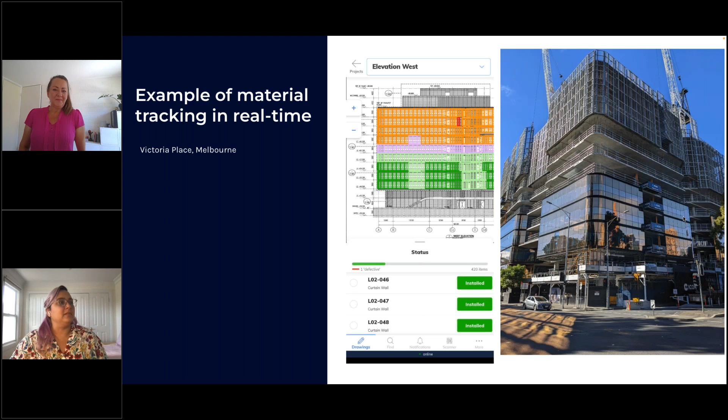Yeah, 100%. So honestly, that's all the slides we're going to really share. The proof is in the pudding, and I really want to hand it over to Zoe to walk us through what it looks like in action - really, how do facade teams today use Matrak and how they can really benefit from this supply chain visibility and connecting all of the players on the supply chain. So I'll hand it over to you, Zoe, to present.

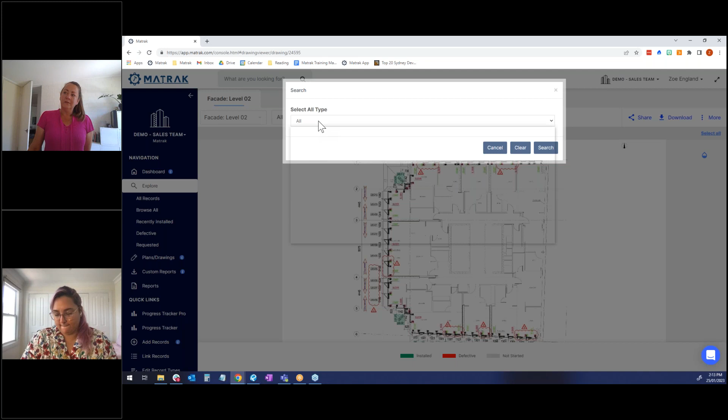So I'm moving to Explore and All Records. I want to look for the facade panels that I'm about to manufacture. In this case, I'm going to come to All, and I'm interested in facade, and I want to look at the facade on level 2.

So I've selected all of those elements. You can really drill down and just go to one unique panel if you want to. In this case, I just want all of level 2, and I'm going to hit search. So you can see I get a nice list similar to Excel, and we can also sort this list simply by clicking on the headers of these columns.

You can see I can bring it up and I can bring it down. So you can see I've got a number of not-started panels sitting in this list. These can also be imported from Excel spreadsheets from the manufacturer's system as well. I'm going to select one of these and I can update that individually, but that's too slow for me.

What I'm going to do is hold my shift key down and I can multi-select. So we've got 11 panels sitting here, I believe, and I can right-click, view 11 records, and you can see I've got all of those sitting in here. So I've got each unique panel ID sitting along the top.

I've got the status sitting here, so I can move that to manufactured. It's still at my factory. If we come down the bottom here, we've got our quality checks that can be ticked off.

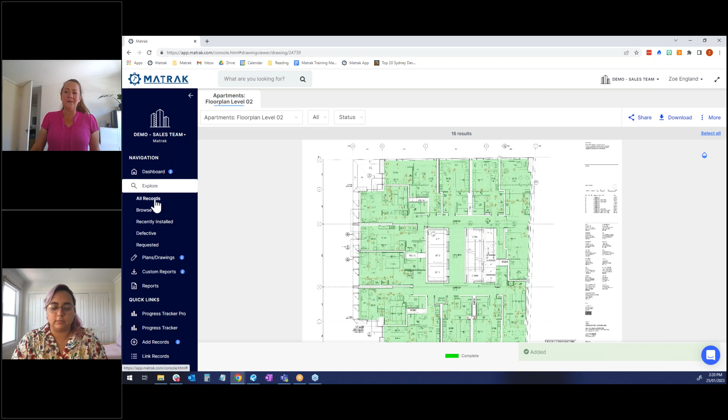I accidentally jumped to another page, but I'll pop back to my all records and you'll see that they've now been added directly into that particular stillage. So I hit search, and you can see those have all been added into the stillage itself.

So that's basically it for the factory. That's been loaded onto the stillage in the container. The cool thing is that you can have your logistics and 3PL company in the system with you, so they can come on and just scan the container or scan the stillage and know X number of panels are sitting in there, and update it as received into Australia, for example.

Are there any questions there so far, Gabs? The only question that's come up actually, and I think it's a perfect time to ask it, is how can we keep track of where the materials are in transit? I think that plays a little bit to what you just spoke about, the logistics piece. How would you answer that?

Yeah, for sure. So what we encourage people to do, and what a lot of our customers do, is actually create a QR code for the stillage itself as well. So if I come back to all records, the way that can be done is once I've popped things onto a stillage, instead of searching for facade, I can search for stillages or shipping containers and hit search.

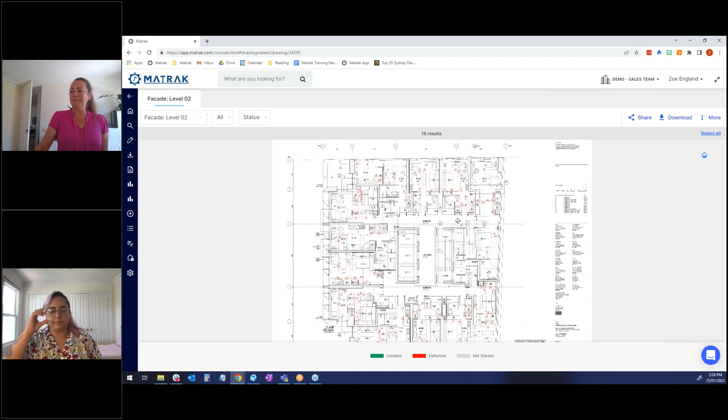Alright, so we've got our facade on level 2, and I'll just let my computer catch up. I think it's already on Australia Day holiday, the internet down here. My apologies, it's ready for some time off, I think. Yeah, that's it, that's it.

Well, while that loads, one question that did come through is, can you use Matrak without having everyone on the system? And I know you have a really good answer for that. So you're talking about the different stakeholders, like different companies? Right, exactly. Like the question is, do we need to have every single company on the system to make it useful?

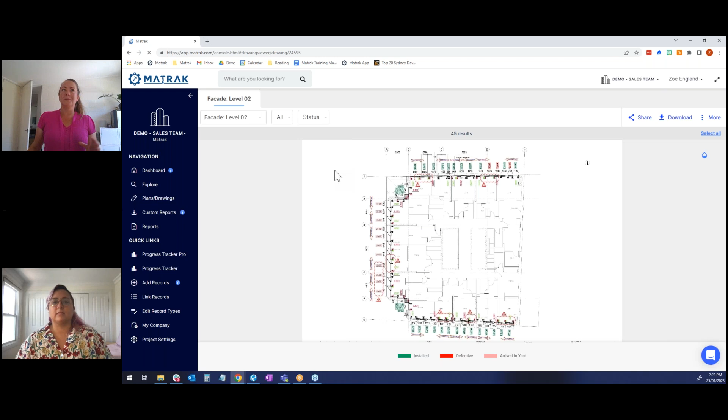The answer is no, but it's much more powerful with everyone on. We do have a number of customers that use Matrak to manage their internal quality checks all the way through to delivery to site, and that's becoming more and more demanded. Particularly, there's a lot more companies, builders, particularly tier ones, trying to use local manufacture because of the instability around the supply chain we've seen. And they're also demanding that those quality checks are spot on and reported really well. So we've got a number of customers that just use it internally, started using it internally and been doing a great job for 8, 9, 12 months. But now they're looking at, actually, it might be useful to start joining their install team or adding the builder directly in as well.

Totally. So, no, I was going to say yes, but there's a lot more value when everyone's together because you can see exactly the movement all the way through. Absolutely, exactly, I was going to say the same exact thing.

Where, so we finally loaded. Yeah, we've loaded.

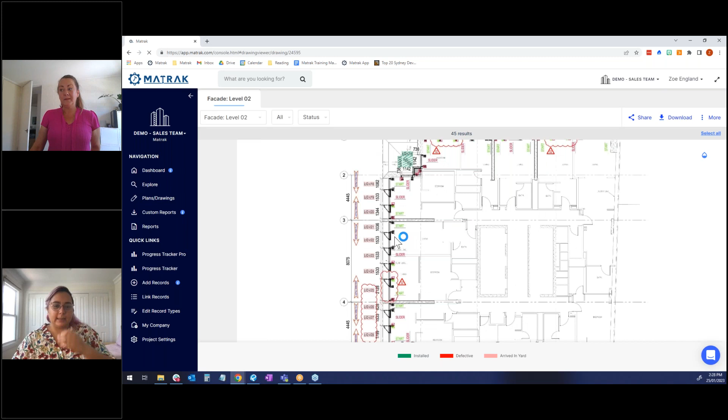Alright, so you can see I've got my facade out right here. We've got all of those panels that we were updating through here. You can see the color code has updated automatically, I can see that it's arrived in the yard. I can click on these. So I'm now the installer, I'll put my installer hat on. I can click through these and update them automatically. It might be I want to know something just about this individual panel, so I can view and edit that one. All I'm doing is clicking on it once.

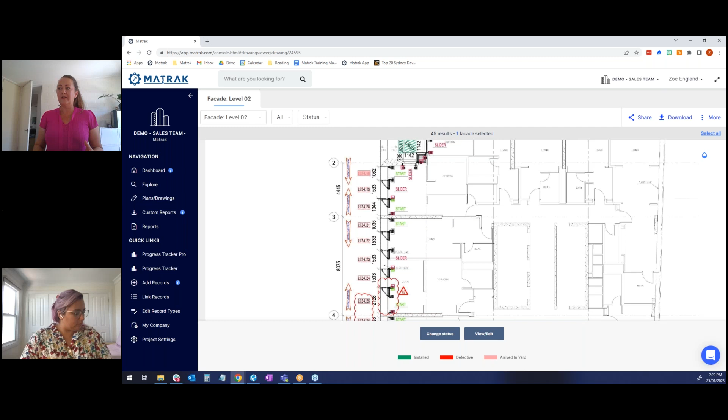And the cool thing is with the mobile app, the drawings are included in that as well. So you can literally just go around and click on your mobile phone or your iPad or your Android device and update information or pull different information through.

So it looks like my computer's just being very special today, so I'll give it just a moment. That's okay, yeah, let's do it. Yeah, so that's not sure if you can see that there. Just a little bit closer, yeah. Mobile, there you go. Yeah.

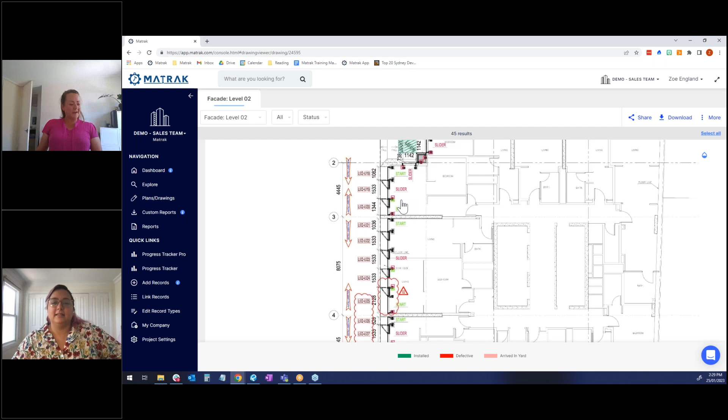It looks really clean and clear. It's actually a lot easier to use than the web version as well. The web version's pretty straightforward, but the mobile app is fantastic.

You can see we've got that individual panel view, where we can look at all of the ITPs that might be in there and click those off. We can add photos, and quite often with Facade we add the measurements of those panels as well. That can be added in, along with weights or whatever else you might need. You can also see up the top, we can include subcomponents if required, like sub-heads and sub-brackets.

I come across to view related, and I can click on this one right here. We can see everything relating to that panel - the sub-head, the sub-bracket, and the stillage it was loaded onto.

And we've got the activity log, which gives you a full audit history of what's happened to that panel and who's ticked different information off. Once it loads, it'll look pretty boring because it just says Matrak support, since it's literally just me updating things all the time.

But each individual can have their own login. With your subscription, you can have as many people in your company on the system as you like. And you can see exactly the time and date a status was changed for a particular panel or group of panels.

If we come back here, we can also upload files. Some people like to upload technical data here, and that can be uploaded automatically. We can also add photos directly in here - if I want to upload a photo from my desktop, I can do that really, really simply.

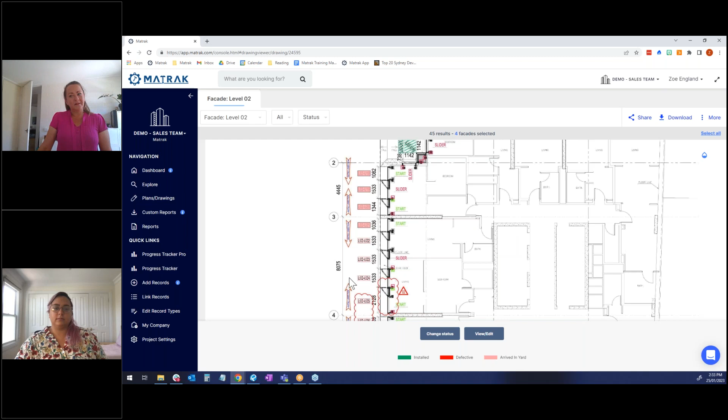So that's the basics. If we come back now, you can see I can say that's arrived in the yard, that's the status. I might want to move it to installed. I'm going to hit close and move back to our custom reports, then over to my facade report.

A lot of our customers have a nice big screen sitting in the site office, with their custom reports open on that screen. What I love about these is they update in real time.

So if I'm sitting in the office keeping an eye on everything going on, I want to know when we can claim for level 2, for example, because it's been 60% installed, so we can put a claim in. I can just use my custom report, which can be exported to Excel, including all the photos and checklists, and sent through to the builder. Ideally, the builder would be on the Matrak system so they could see for themselves.

You can see I'm just looking at level 2, so I've created a few filters here - if we do a longer demo at some point, we can include how to do those, but I'm going to keep it light. I'm just scrolling down a little, and at the same time opening up on my other screen. You can see we've got the arrived in yard items right here.